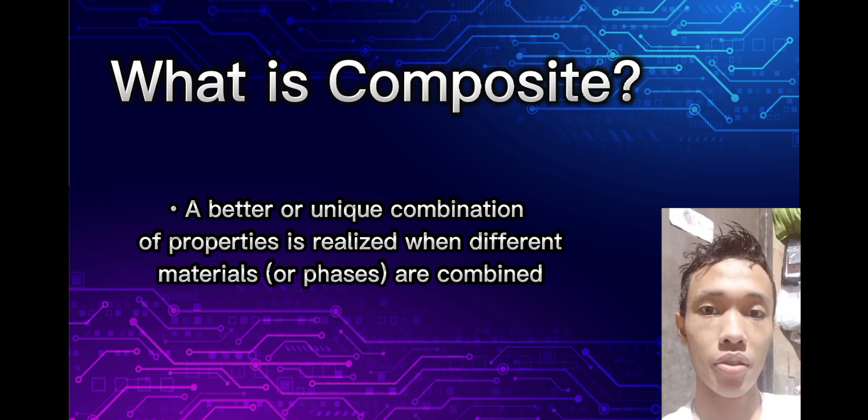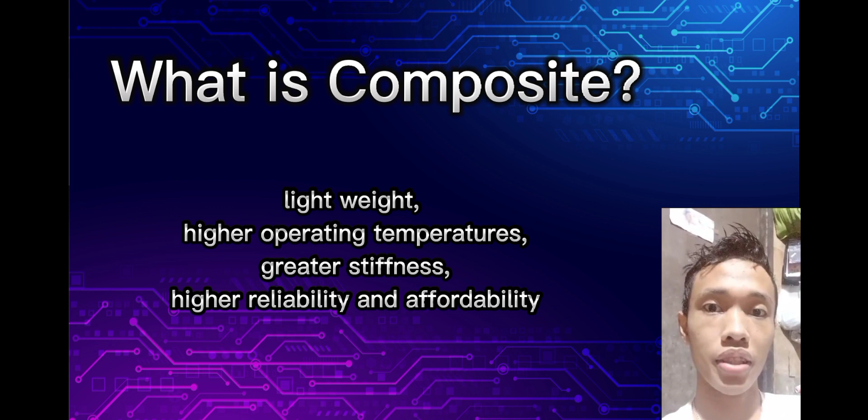What is composite? A composite is a mixture of two or more phase materials. A better or unique combination of properties is realized when different materials or phases are combined. The primary needs for all the advanced composites are higher operating temperatures and greater stiffness, higher reliability, and affordability.

What makes a material a composite? Composite materials are formed by combining two or more materials that have quite different properties. The different materials work together to give the composite unique properties. But within the composite, you can easily tell the different materials apart. They do not dissolve or blend into each other.

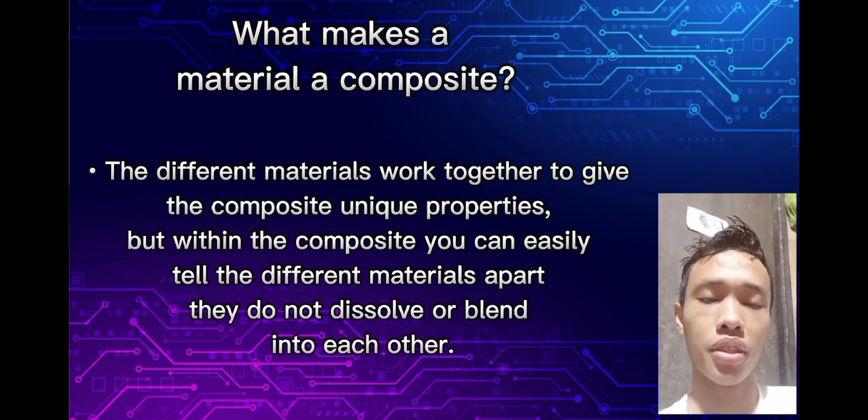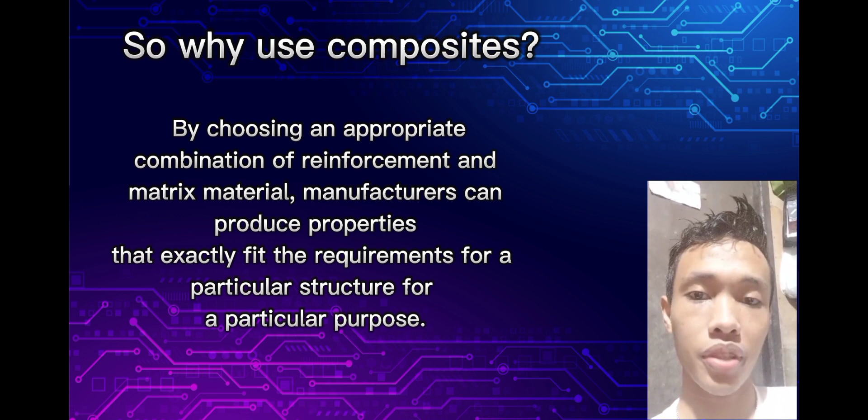So why use composites? The greatest advantage of composite materials is strength and stiffness combined with lightness. By choosing an appropriate combination of reinforcement and matrix material, manufacturers can produce properties that exactly fit the requirements for a particular structure for a particular purpose.

Modern aviation, both military and civil, is a prime example. It would be much less efficient without composites. In fact, the demands made by that industry for materials that are both light and strong have been the main force driving the development of composites. It is common now to find wing sections, propellers, and rotor blades made from advanced composites, along with much of the internal structure and fittings.

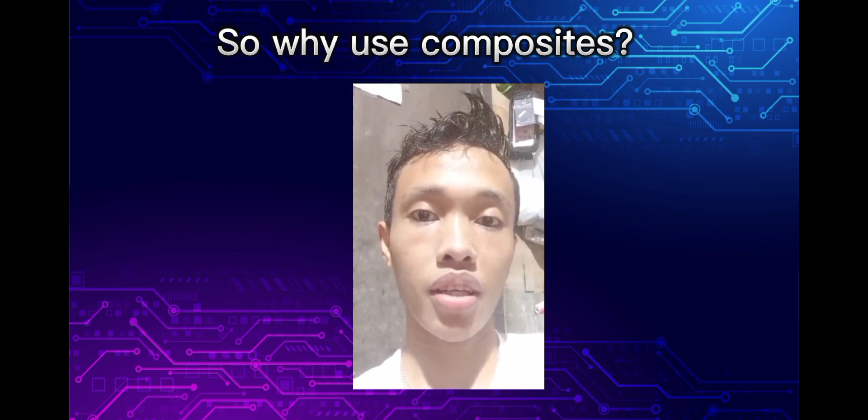The airframes of some smaller aircraft are made entirely from composites, as are the wing, tail, and body panels of large commercial planes. It is worth remembering that composites are less likely than metals, such as aluminum, to break up completely under stress.

A small crack in a piece of metal can spread very rapidly with very serious consequences, especially in the case of aircraft. The fibers in a composite act to block the widening of any small crack and to share the stress around. What are composites made of?

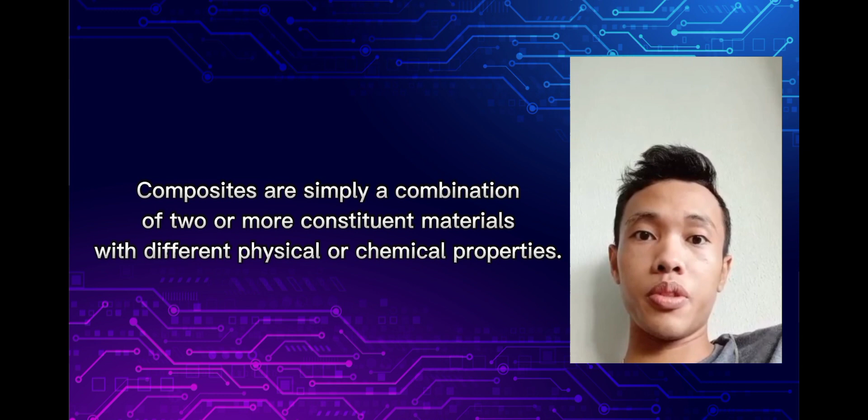Humans learn from Mother Nature to develop new composite materials. Natural composites: wood and bamboo, shells, bones, muscle, other tissues, and natural fibers such as silk, wool, cotton, jute, and sisal. Composites are simply a combination of two or more constituent materials with different physical or chemical properties. When they combine, they produce a material with characteristics different from their original properties.

The two main components within a composite are the matrix and fiber. The matrix is the base material while the fiber is what reinforces the material. On top of the fiber reinforcement and matrix, composites can also include core materials, fillers, and surface finish to provide unique performance attributes.

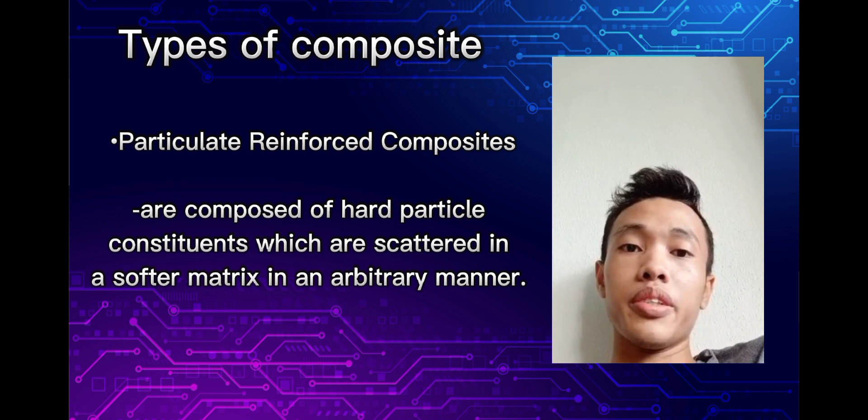So for the four types of composite: particulate reinforced composites are composed of hard particle constituents which are scattered in a softer matrix in an arbitrary manner. Number two, flake composite. This type of composite is produced by blending matrix material and flakes.

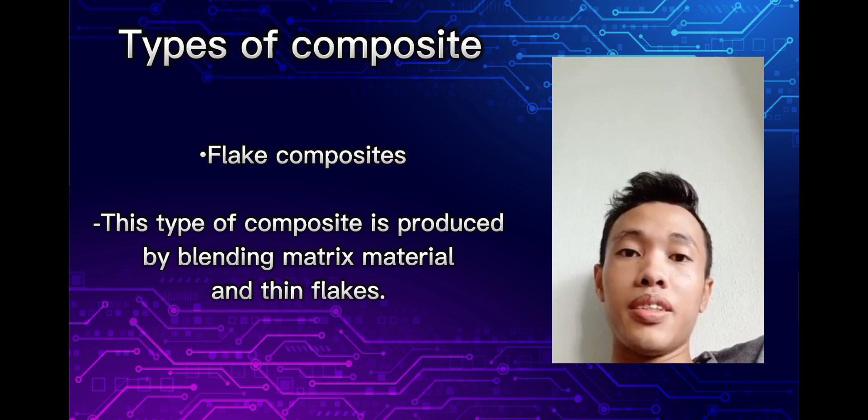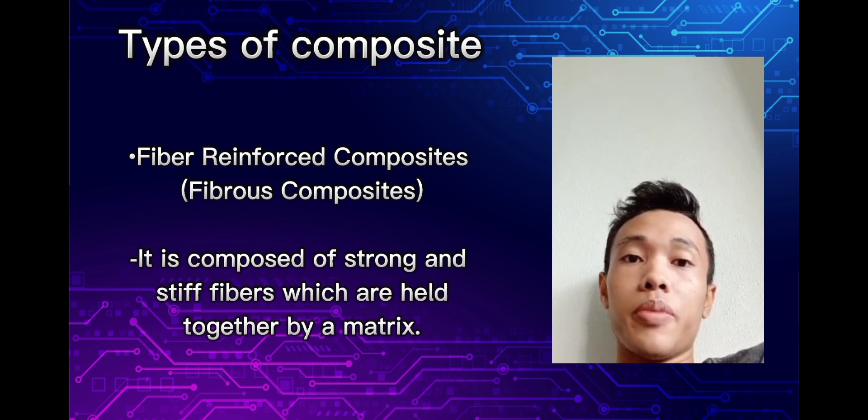Number three, fiber reinforced composite, or fibrous composite. It is composed of strong and stiff fibers which are held together by a matrix. Number four, laminated composites. Laminated composites are made from completely bonded elementary layers.

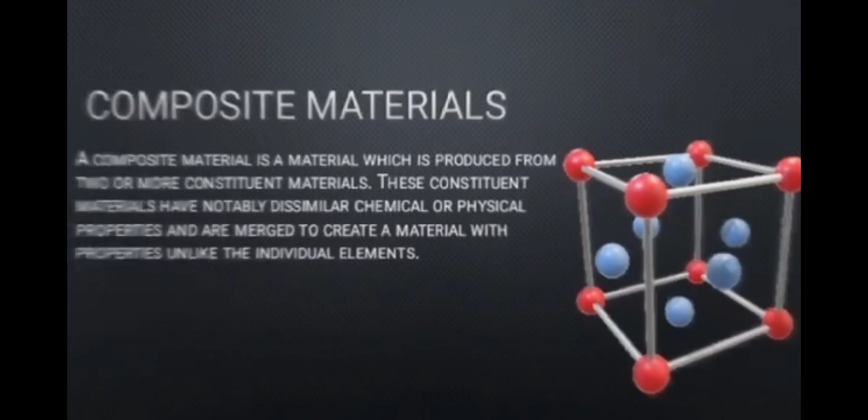Composites are ideal for applications in corrosive environments such as chemical processing plants, pulp and paper converting, oil and gas refineries, and water treatment facilities. Common applications include fans, grating, tanks, ducts, hoods, pumps, cabinets, and especially in electronic parts.

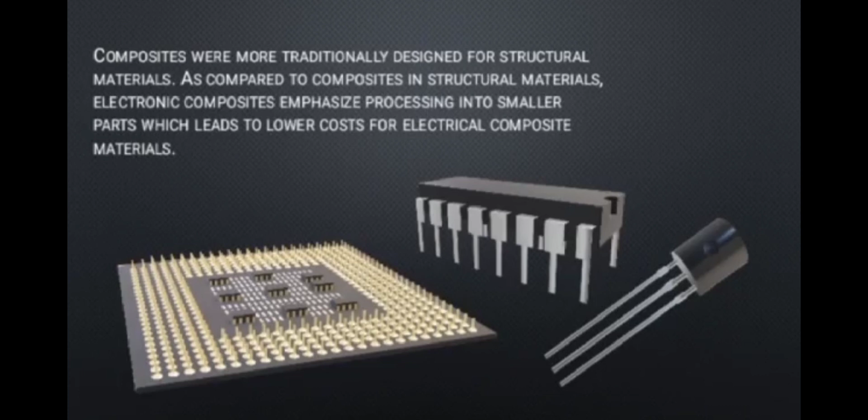The electrical industry relies on the properties of electrical composite materials for top performance, unlike parts molded from plastic which can carbonize or melt during exposure to electrical arcing or tracking. Most composite materials experience minimal impact from these common electrical equipment conditions. Composites were more traditionally designed for structural material. Electronic composites emphasize processing into smaller parts, which leads to lower costs for electrical composite materials.

Applications in the electrical industry. The unique properties of thermoset composites make the material ideally suited to the rigors of use in the electrical industry. Phenolic matrix and melamine composites are used in many electronics including printed circuit boards, gears, and insulators. Insulation, circuit boards and components requiring a high resistance to heat will often be made from a silicone-based composite.

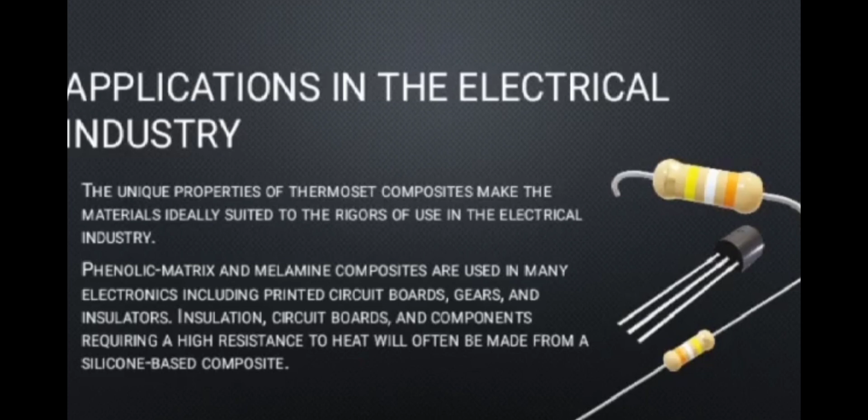Additional applications include control system components, circuit breakers, arc chutes, arc shields, terminal blocks and boards, substation equipment, microwave antennas, stand-off insulators, pole line hardware, and printed wiring boards.

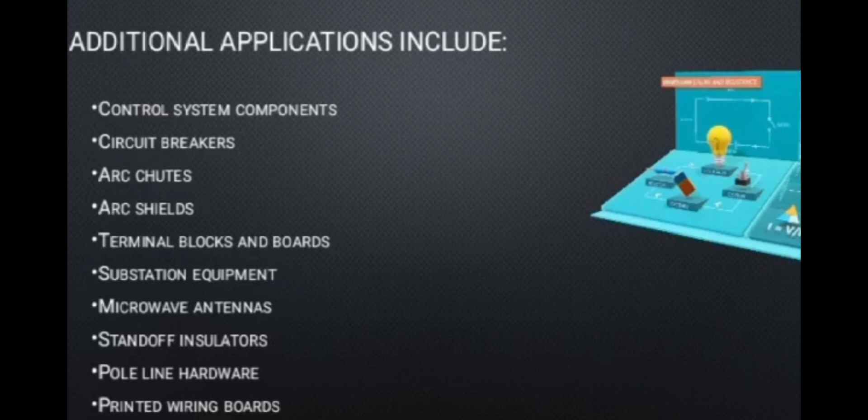Why composite materials? The risk of breakage, underperformance, or failure in electrical equipment can have devastating safety consequences and significantly impact a company's profits and performance. Electrical equipment requires components that withstand heat and friction and perform reliably over time. These properties are derived from the nature of the composite components. The resin matrix and the reinforcement comprise the major components.

The dielectric strength of thermoset component materials has made thermoset composites the go-to material for electrical components. The unique properties are the result of the network of cross-linked molecules that create a rigid structure. Chemical bonds hold the molecule in place. As a result, compounds made with thermoset binders keep their physical and electrical properties under chemical loads during prolonged exposure to elevated temperatures.

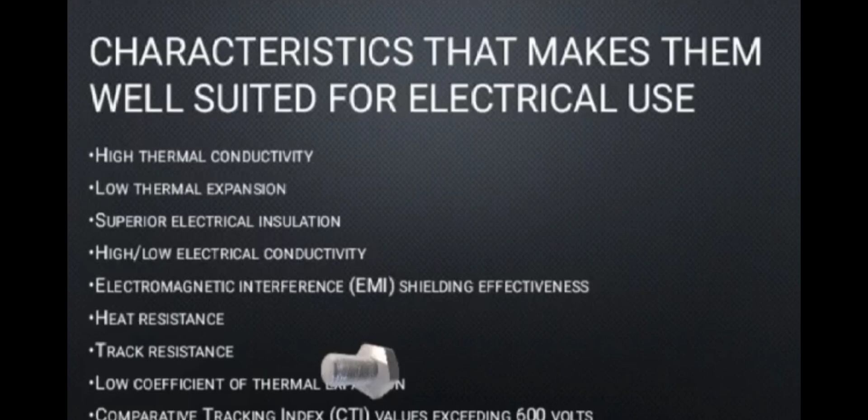Characteristics that make them well suited for electrical use: high thermal conductivity, low thermal expansion, superior electrical insulation, high-low electrical conductivity, electromagnetic interference (EMI) shielding effectiveness, heat resistance, track resistance, low coefficient of thermal expansion, and comparative tracking index (CTI) values exceeding 600 volts.

Where are composites used? Today, thermoset composites are used in a wide range of industries, including aerospace. In aerospace, thermoset composites are being specified for wings, fuselage, bulkheads, and other applications in commercial, civilian, and military aerospace.

Appliance and business. Thermoset composites are being used in frames, equipment, panels, handles, and trims in appliances, power tools, business equipment, and many other applications. Thermoset composites for the appliance industry are used in washers, dryers, refrigerators, freezers, ranges, ovens, and dishwashers for components that include control panels, handles, knobs, vent trims, side trims, motor housings, kick plates, and many others.

Composites are also used in automotive, transportation, farm, and construction. Composites are now being used in vehicle and equipment applications including panels, frames, interior components, and other parts. Civil infrastructure. Some composite infrastructure applications include buildings, roads, bridges, and pilings. In construction, thermoset composites are replacing many traditional materials for home and office architectural components, including fixtures, doors, wall panels, roofing, windows, frames, molding, vanity sinks, shower stalls, and even swimming pools.

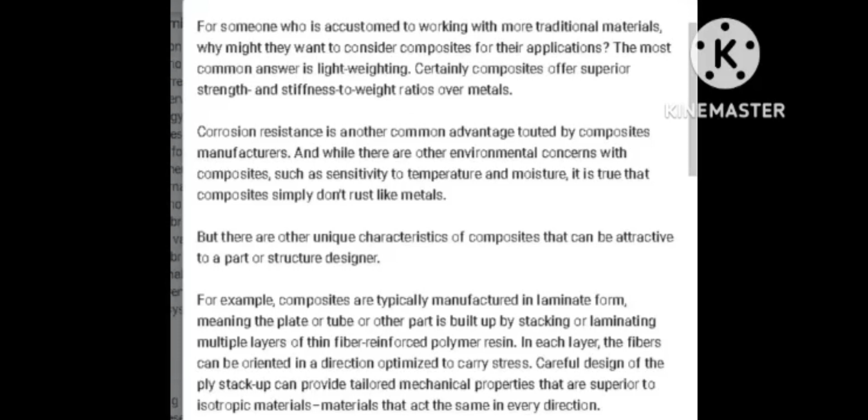Another lesser known advantage of composites is that they are very damage tolerant, as opposed to metals that may fail due to initiation and growth of a single crack. Well-designed composites typically fail due to slow accumulation of many microscopic damage mechanisms. Fibers tend to blunt propagating cracks, so by having fibers running in multiple directions, slow-growing cracks are either stopped or forced to change direction, whether loaded to failure in monotonic manner or loaded cyclically over millions of cycles.

The evolution of damage may consist of matrix cracks, fiber matrix debonding, fiber fractures, and delaminations. The result is loss of stiffness or modulus over time, and in some stiffness controlled applications, the designer must account for the change in stiffness. In doing so, the resulting factor of safety on strength is often very high. This damage tolerance can also change the shape of the fatigue life curve, which may have implications for design or test programs as well.

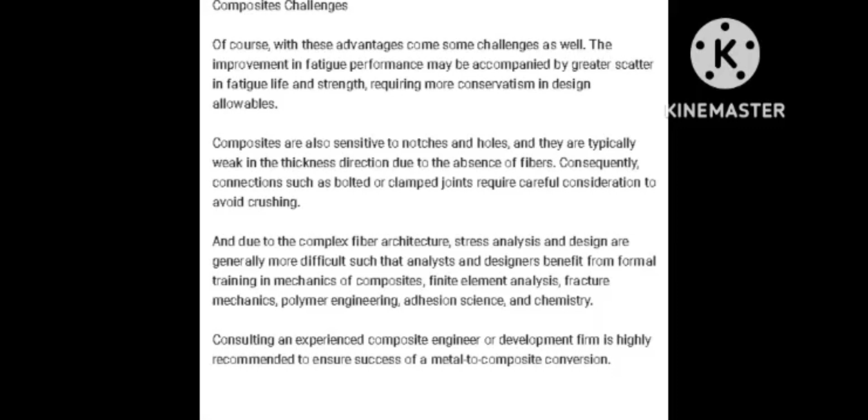As another source, these are the advantages of composites: high strength and stiffness to low weight ratio, material can be designed in addition to structure, and structure can be manufactured to eliminate joints.

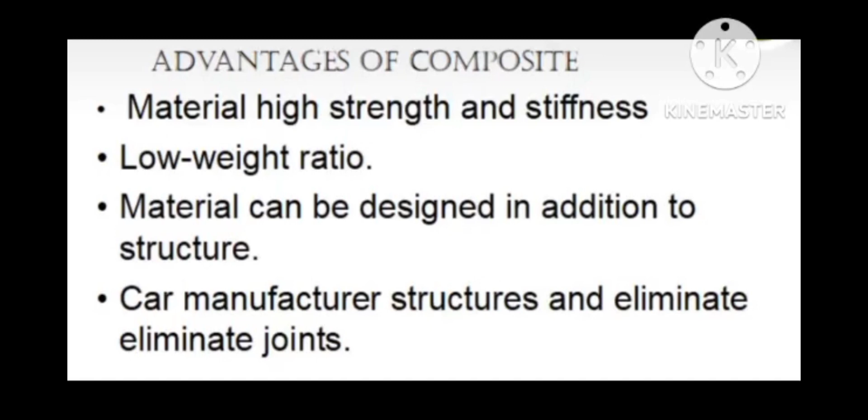And these are the disadvantages of composites. Composites are heterogeneous, and properties in composites vary from point to point in the material. Most engineering structural materials are homogeneous. Composites are highly anisotropic. The strength in composites varies as the direction along which it is measured changes. Most structural materials are isotropic.

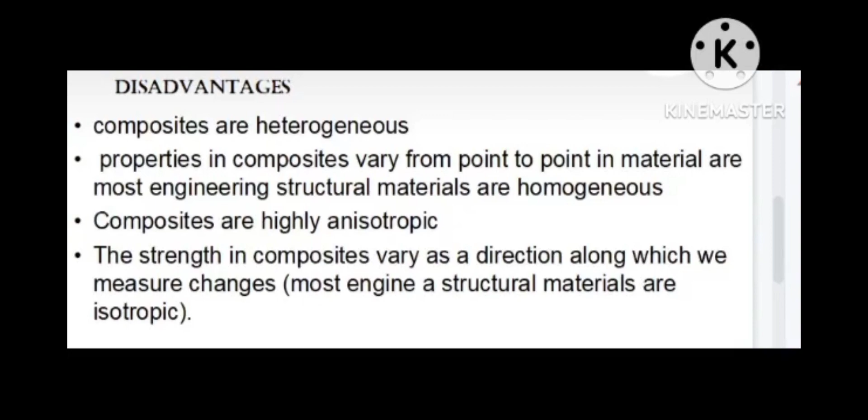As a result, all other properties such as stiffness, thermal expansion, thermal and electrical conductivity, and the resistance are also anisotropic. The relationship between stress and strain is much more complicated than in isotropic materials.

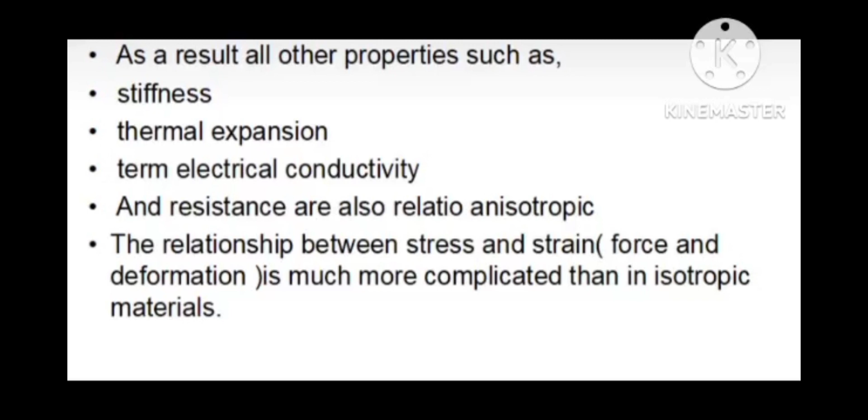What composite materials are being used in the field of electronics engineering? Phenolic matrix and melamine composites are being used in electronics engineering. Phenolic and melamine are thermosetting adhesives that form strong bonds and have good resistance to high temperatures. As thermoset materials, they require heat and pressure to cure and to form a secure bond.

Phenolic resins are fairly low in cost. These extremely durable resins are made from chemicals of the phenol group. Typically, phenolic resins are supplied in liquid, powder, and filled form. One of the major contributions of phenolic resins is their use as a matrix in fiber-reinforced composites to prepare materials with low fire smoke toxicity coupled with favorable economics and excellent properties.

Phenolics are made of alternating layers of resin and materials, usually cloth, paper, or glass-based fabric. Melamine resins are made through a reaction of melamine with formaldehyde. Most of the resins in this group have excellent dielectric properties. Melamines have a lower molecular weight and are water-soluble, making them useful for laminating or impregnating objects made of other compounds, including paper or board.